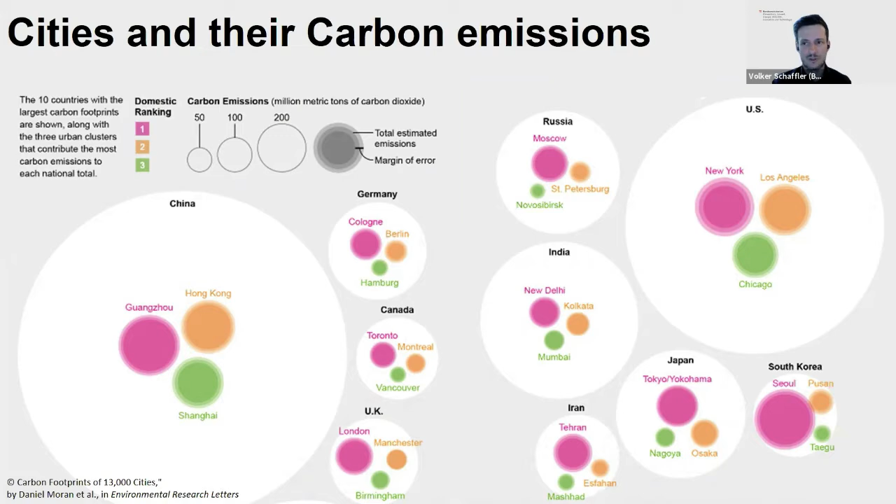In our opinion, there are more or less two levels of how to demonstrate and prepare a climate neutral city. The first one is the district level, where you can solve many problems in a small, self-organizing way, and build up synergies between supply and demand. This is the level where I think a lot of new businesses and services will come up in the next years, making an impact on a very local business level.

And of course, the higher city level, where you need to plan the technical infrastructure of tomorrow and bulletproof your planning processes and your legal framework. Because we have more or less a stock of technologies that need to be implemented. Those will be the drivers of the future, but we're still preparing new business models to bring this to the ground.

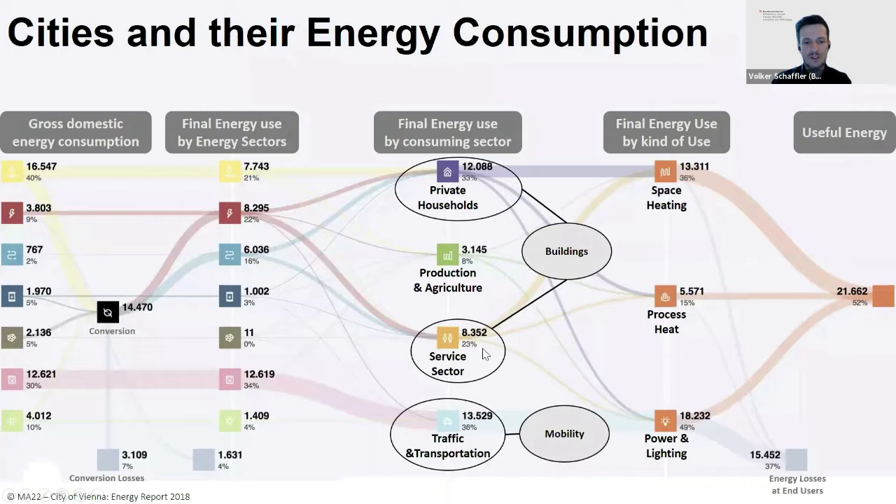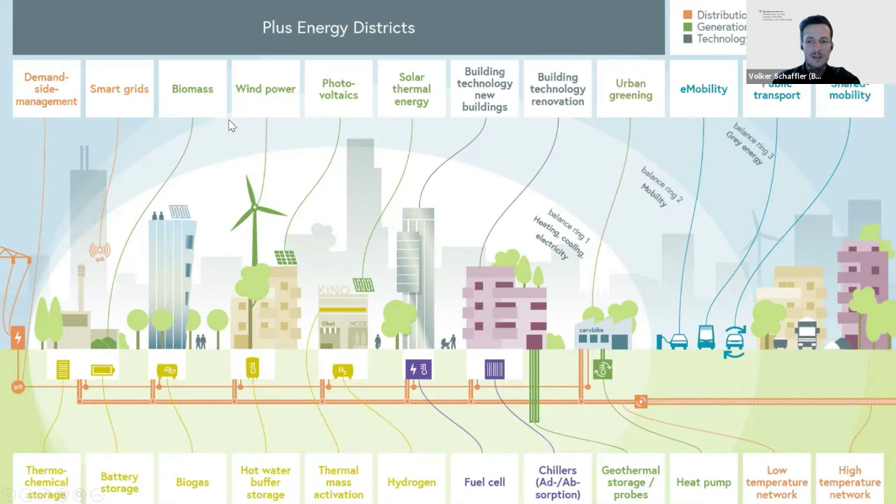I'm the coordinator of a program called City of Tomorrow, and our target is to enable Austrian companies to become climate neutral by 2040. We started in 1999 with the mission to demonstrate the first passive house in Austria, and now Austria is more or less passive house champion. We have improved the whole Austrian construction and planning sector.

Now you can buy a passive and plus energy house solution as state of the art. We have really improved our sectors, and now Austrian construction and planning companies are best known for their quality and how they can handle complexity.

We also develop and demonstrate the technology and solutions for this mission, called Climate Neutral Cities. Together with the European Union, we have a research mission called 100 Climate Neutral Cities by 2030. The ministry I'm working for has initiated and funded about 80 demonstration projects all over Austria, from greenfield development for new districts to plus energy renovation buildings.

Our ambition was that all of these solutions are proven and can be ordered as status quo in the future. So we work very closely together with Austrian standards and the representatives of the practitioners. This is really key.

Austria is also hosting the Austrian Green Planet Building Award, which honors outstanding achievements of Austrian companies worldwide in the planning and construction of sustainable buildings. There are several of these awarded buildings all over Asia, and their clients abroad who have been significantly involved in the planning and construction of buildings that meet the requirements of the GPB awards.

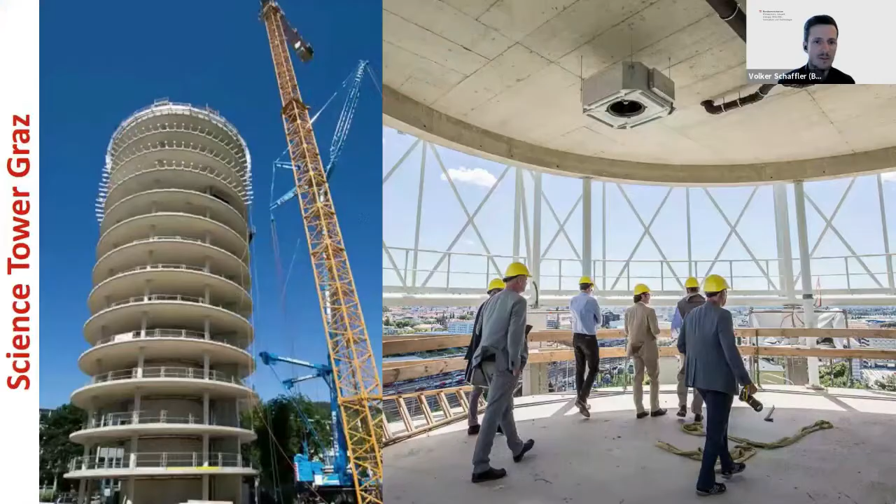But we also have new buildings like the Science Tower in Graz, with a facade with dye-sensitized solar cells, for example. There's a great building located in the city of Graz, which is the second largest city in Austria. It's a demonstrator also for the company who built the technology.

We also did a project called Plus Energy Building University for the Technical University of Vienna, which is still one of the most efficient office buildings in Europe. It was a renovation project, and we managed to renovate this building to plus energy standard, meaning it covers not just heating, cooling, and electricity for technical facilities, but also the electricity that people and workers consume. It's super smart, with more than 500 small actions, like a whole floor shutting down when the last employee leaves via chip card, and the building cooling itself with cooler night air in summer. If you're ever in Vienna, you need to visit this building.

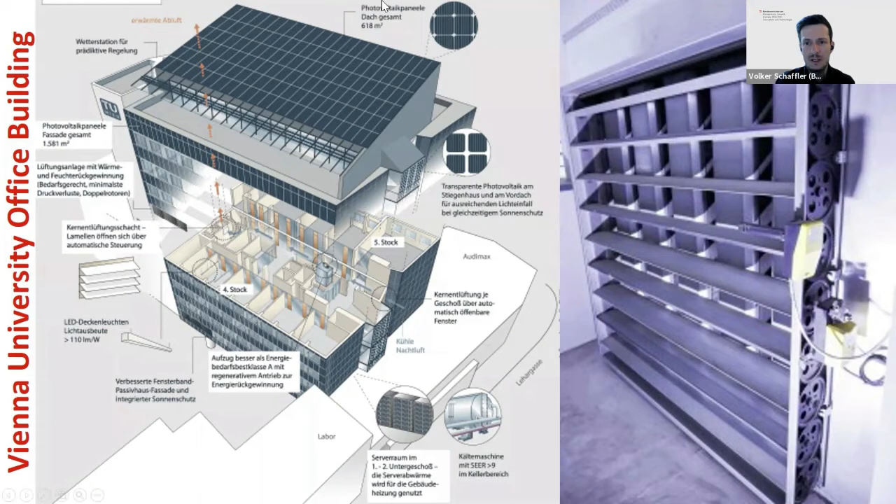But this was on the building side. Currently we're focused more on the district level, because you can build much more synergies there. We have two development areas that are very advanced. One is in the city of Vienna, called Smart City Aspern, where we started together with Siemens, a research company, trying to work with Aspern as a real lab. It's an urban district with a very holistic and sustainable approach for energy supply and consumption, which is all cross-linked. This district is a role model for the future of the city of Vienna and also for Austria.

So we try to implement new building technologies, like wooden skyscrapers and so on. Smart City Aspern is also an urban district retrofitting area—actually, Aspern is a new build area, while Smart City Graz is the retrofitting area, with a smart heat grid, solar heating and cooling, but also a very social approach, where we try to include social issues and also manage mobility within the districts, trying to minimize car traffic but also logistics.

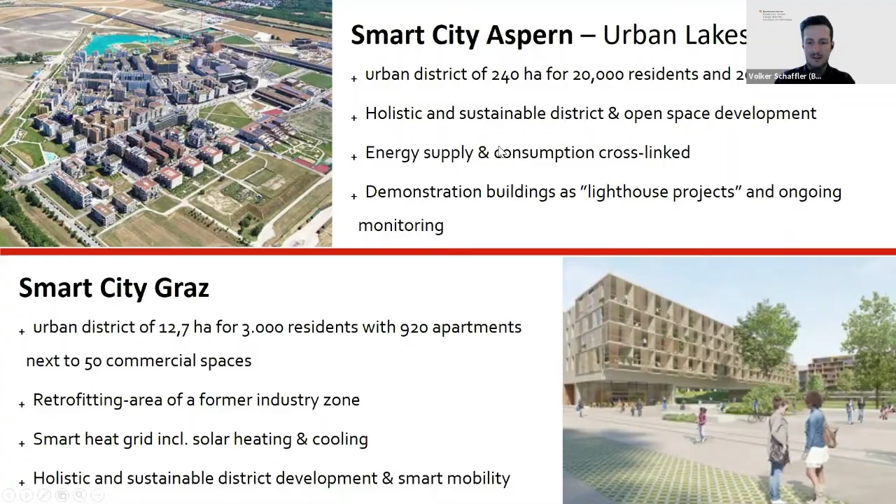In the city of Aspern, we also built several very advanced buildings, like Aspern IQ, which is a plus energy building, meaning it produces more energy than its demand. It's very highly sophisticated, and I would say currently with Austrian technologies, you are really able to buy all these technologies and solutions.

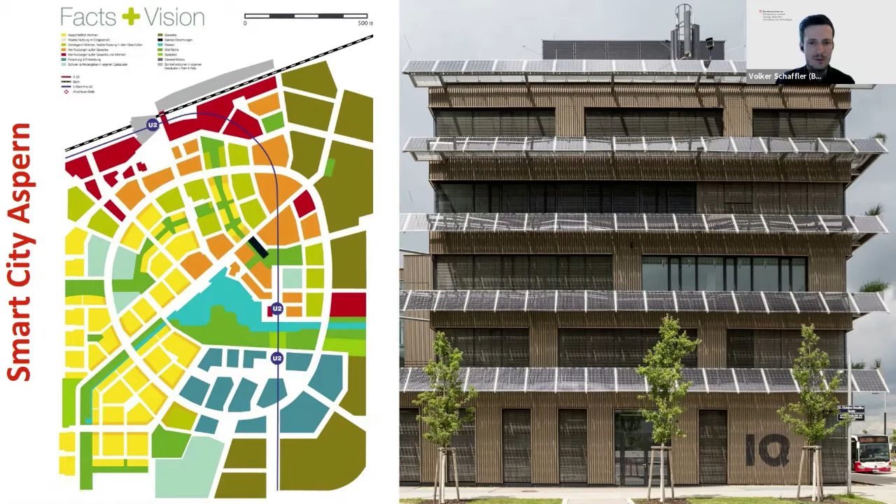The thing we're facing currently is that we try to build up new business plans, because the construction or even the real estate sector is focusing on a return on investment of about 3 to 5 years, and these buildings need a longer look at return on investment, up to 10 years I would say.

But we found out that especially in office buildings, over the lifespan, 20% of lifespan costs is the investment into construction, 80% is maintenance, operation, and renovation. So it's really a key issue to focus on the whole life cycle of the building, and that's what we're doing. I hope that you will find an exchange with Austrian companies who are really able to develop, implement, and offer you those technologies. Thank you.

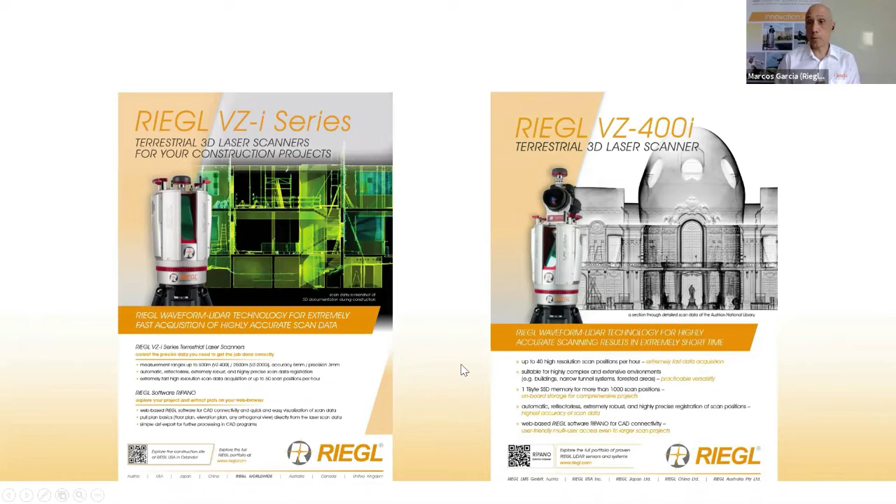Thank you. Thank you very much, Marcos. I'm

I'm sure many of the participants in Hong Kong are aware of this increasing use of laser scanning, and Riegl is helping Lands Department do a lot of laser scanning recently, so we will hear a lot from you again.

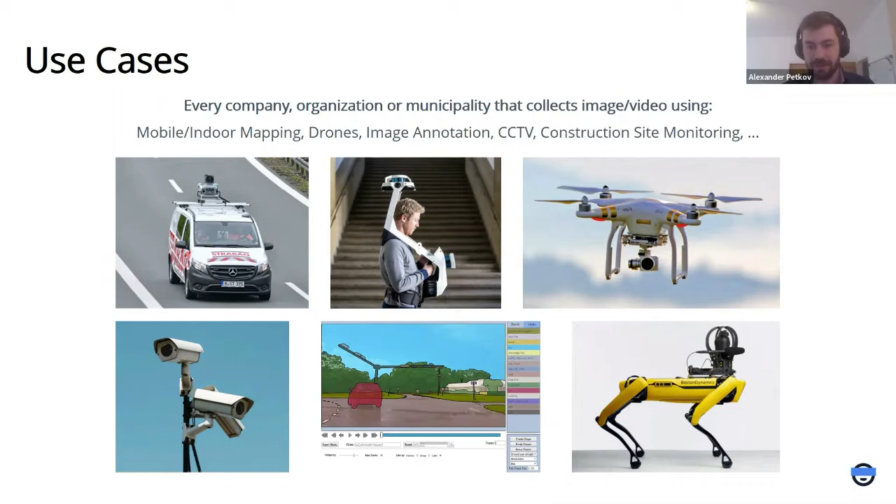So which use cases can our solutions be used for? We started with mobile mapping, including indoor mapping, and expanded quickly into images and videos acquired via drones, so aerial images. It also works with all types of images acquired by autonomous vehicles or autonomous devices like robots, and of course CCTV systems.

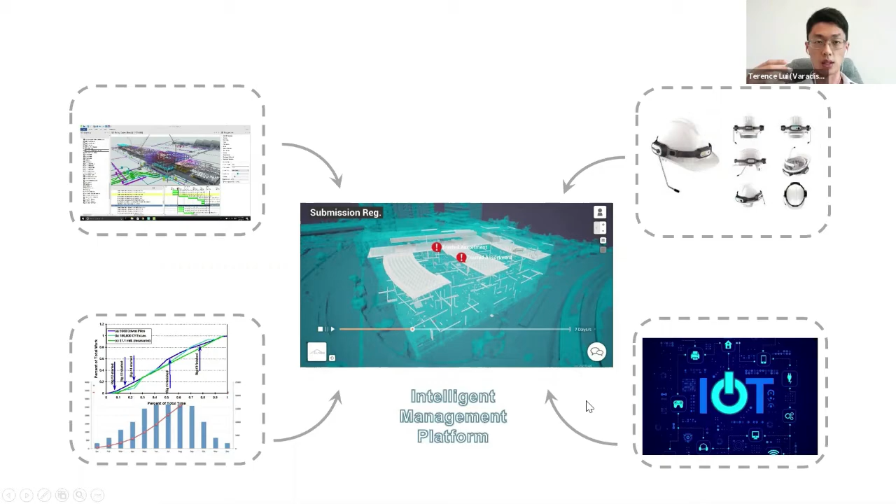So today I would like to share one example from a Hong Kong government project. Maybe we can go to the next slide.

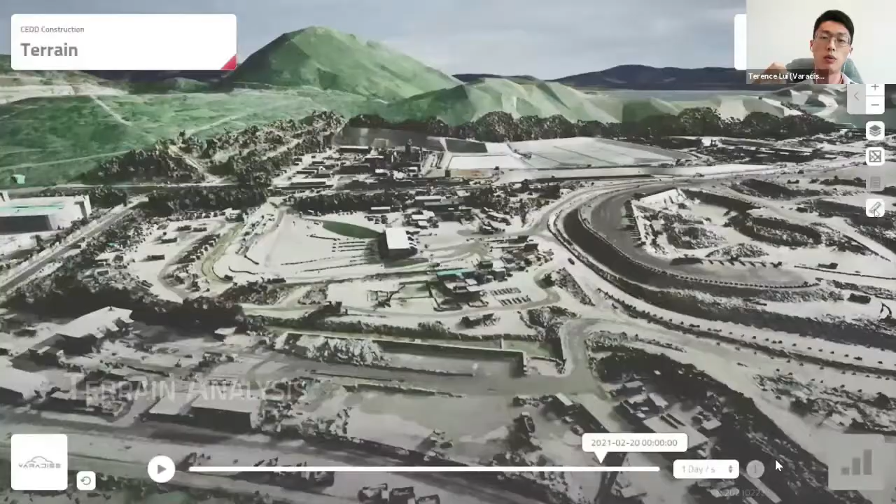Yes, so as you can see, this is one of the digital twins of a construction project. It's lagging a bit because of the streaming of the Zoom video, but you can see with photogrammetry you can literally monitor what happened over time, which part is excavated, which part is filled. All the records are kept in the cloud, so people can discuss interfaces a lot easier, rather than going on site to talk about it or talking about it over the phone.

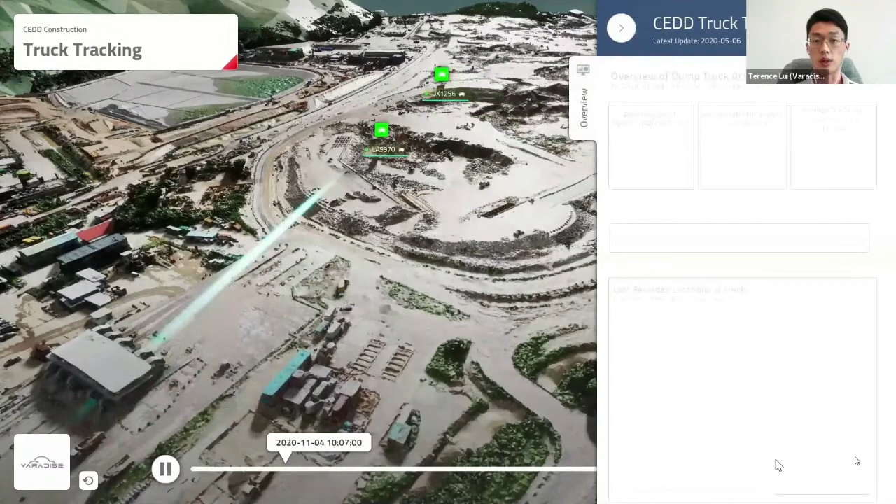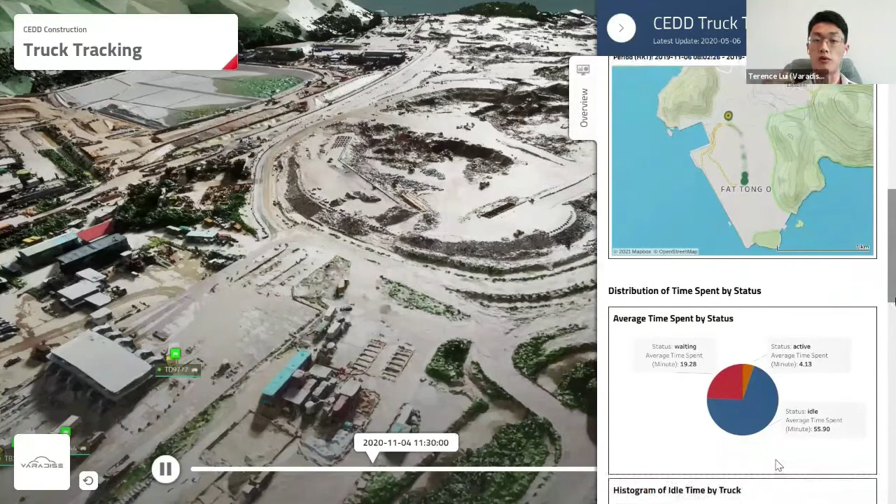People can also, with GPS sensors, monitor their dump trucks and other resources, how they are doing. Not just visualizing, but actually analyzing and recording all the activities happening on site, and analyzing the performance, whether it's operation efficiency or safety. So this is some kind of centralized platform that tells you everything about your project.

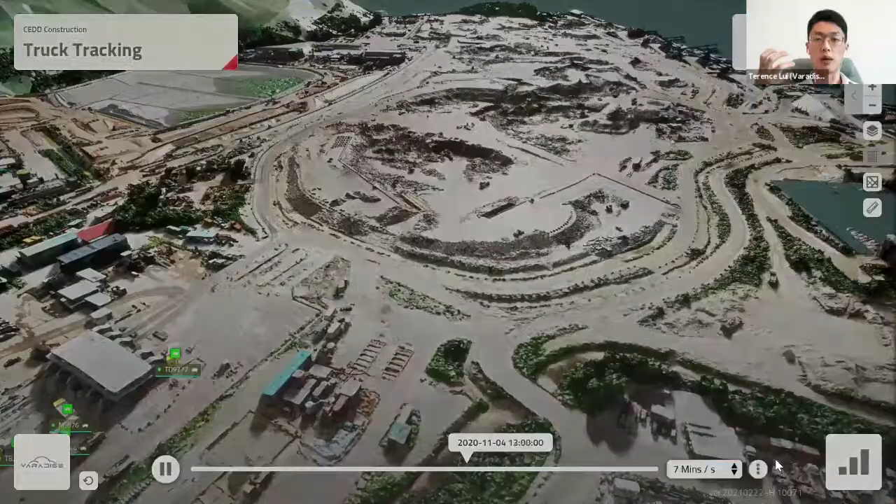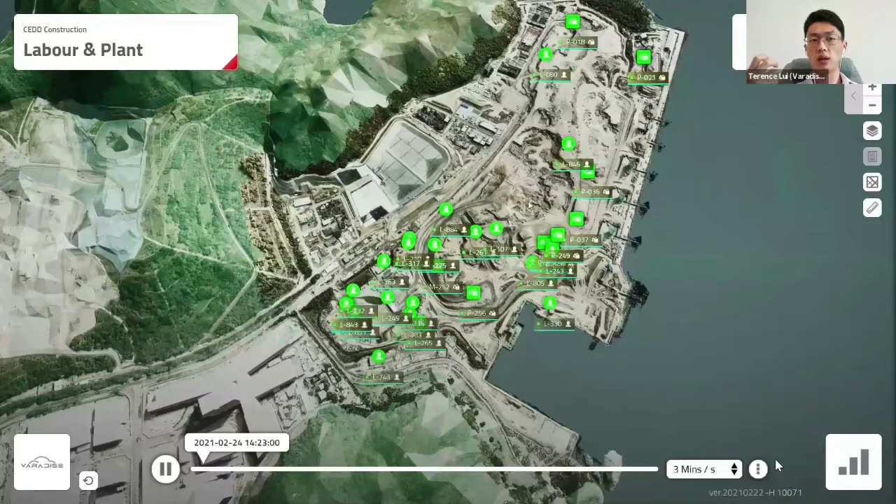Even with smart helmets, we'll be able to tell where your workers are, how many people are working on site, whether they are working safely, whether they are getting a fever, or whether they fell down. All of this is monitored 24/7 through sensors.

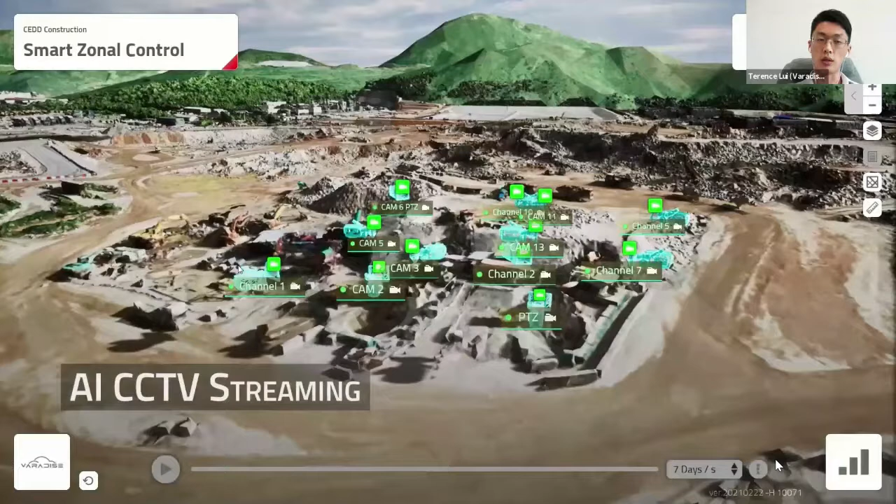I think CCTV is also another important source for capturing what happened on site. With image recognition, when people enter fatal zones or danger zones, alerts can be prompted immediately in the platform, so you receive an alert right away, rather than something happening without people knowing, which may cause a serious consequence.

So I think digital twin technology builds on these traditional collaboration platforms. People rely on dashboards to capture things and present them in report formats or charts. But for construction, you heavily rely on spatial data, because you need to know exactly what's happening out there. A simplified version of numbers or charts is sometimes hard to use to describe what is happening, so I think digital twin will become the future of this kind of centralizing platform.

You're not just analyzing patterns or numbers, but you're literally analyzing spatial data and seeing what's happening there. So maybe we can go to the next slide.

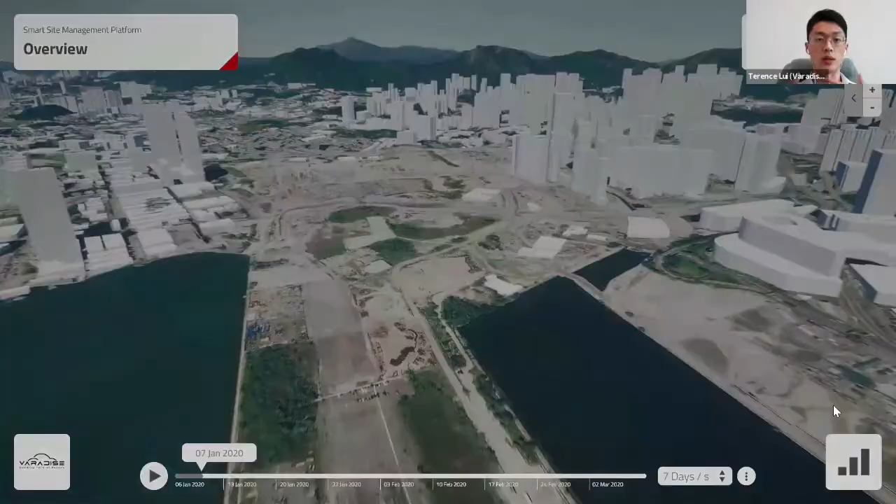So just now I talked about using digital twin to monitor construction projects, but what if we scale it bigger? If you can monitor a project or physical change in 4D over time, what if you're monitoring a city? Can you do the same with city management? I can't talk about too much details right now, but something is definitely happening. We have the Hong Kong model, the virtual Hong Kong model. So if you digitize the process and visualize it on platforms to monitor and analyze, you can determine what is better or how to manage urban development more effectively. That's what I wanted to share today.